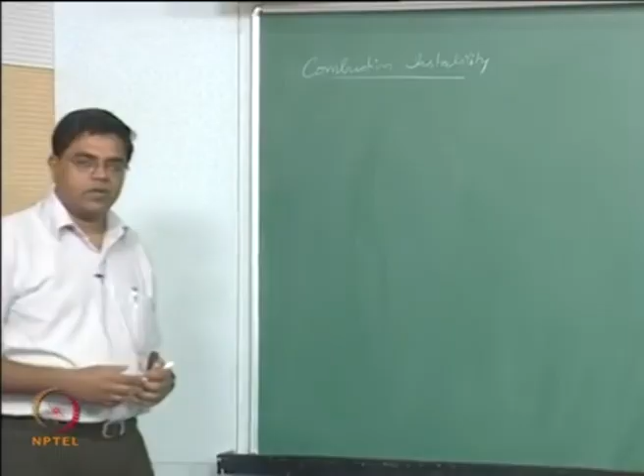Today we will talk about, in just about one lecture, this fairly broad, rather interdisciplinary topic of combustion instability. We include this because it's my favorite topic, and I wanted to cover it as part of the lectures on combustion. Again, the goal here is to show that whatever we have learnt in the laminar framework can be used to understand more complicated problems, one of them being combustion instability.

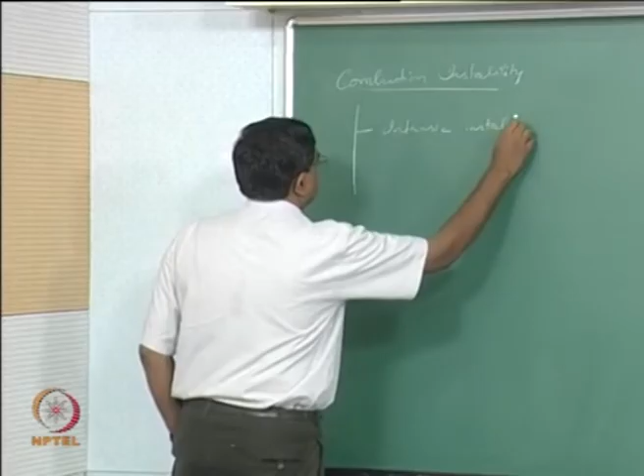Early on, I think Williams had actually identified that there are three aspects to combustion instability: one is intrinsic instability, the second is combustor instability, and the third is system instability. We will first briefly look at what these individually mean, and then start looking at the details of each.

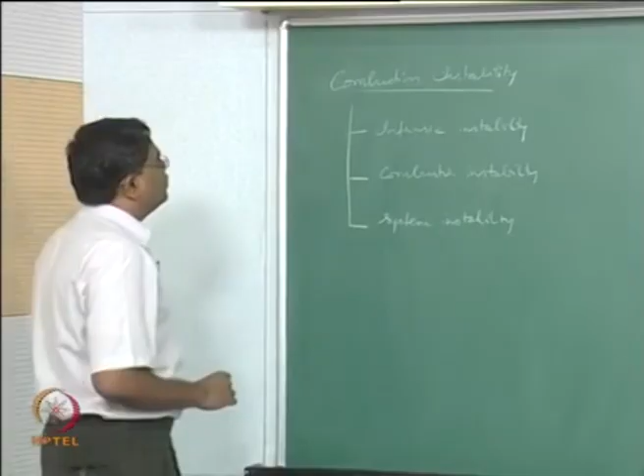But before that, we should first look at the word instability, regardless of combustion. The idea of instability is not specific to combustion. It's something that comes from what we call perturbation theory. Essentially it's an idea, of course much more than that—I think it's a much more commonsensical idea.

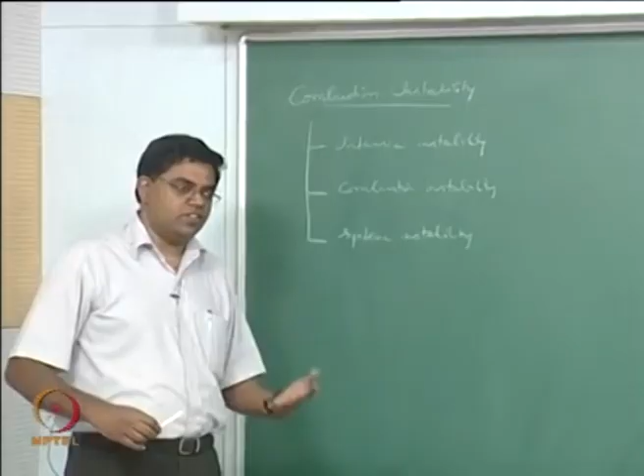There are lots of things around us which show inherent characteristics of instability. Some extremely social examples would be, for example, if I don't exercise I grow heavier, and that makes it more difficult for me to exercise, so I keep growing heavier—that's an instability. Or another example: if people stop using public transport, the transport system runs in losses, so they run fewer buses, and therefore we go further away from using public transport, and the buses stop running, and so on. Lots of such social or human situations go through what's called instability.

So the basic idea is, if you have a system which we think is in equilibrium, and then we try to make a small perturbation, the question is whether the system comes back to the original position, or goes away from it. There are a few different things that are important here.

You could have a dynamic system which is in equilibrium locally, that is, at a particular set of parameters. For example, in a flow system the parameter could be Reynolds number; in a combustion system it could be equivalence ratio. You could be running an engine at a set of conditions like airflow rate, equivalence ratio, pressure, and initial temperature of reactants. For that set of conditions you have some equilibrium, and we are talking about perturbing about an equilibrium for a given set of conditions.

If you move your set of conditions, you reach a new equilibrium, and that need not necessarily be as stable as the previous one. So equilibrium doesn't necessarily mean stability—you could have an unstable equilibrium or a stable equilibrium.

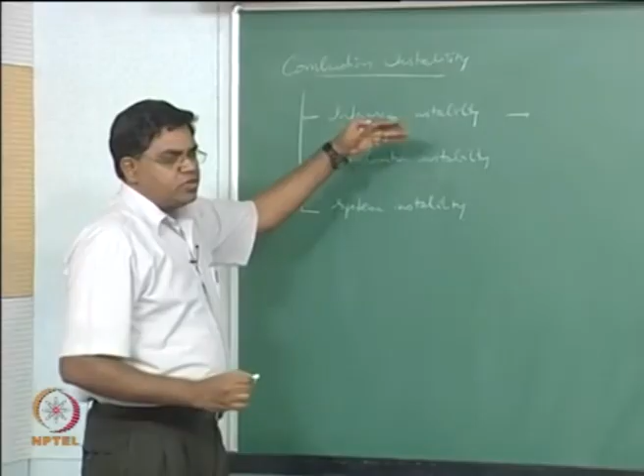Intrinsic instability, then, is actually an instability where you do not have anything else coupled to the combustion—it is only the combustion itself that is unstable. So the flame exhibits instability by itself.

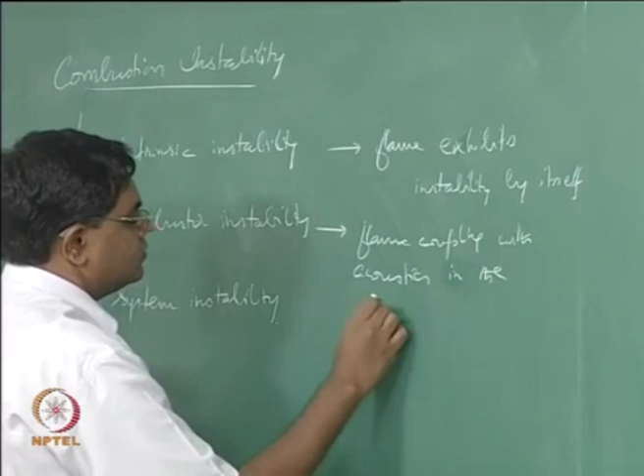A combustor instability is a system of flame coupling with acoustics in the combustor. This is a flame-acoustic system where you have a feedback loop between the flame and the acoustics in the combustor. Essentially, it is not a standalone combustion that is going unstable, it is combustion coupled with acoustics in the combustion chamber that is going unstable. So that is the combustor instability.

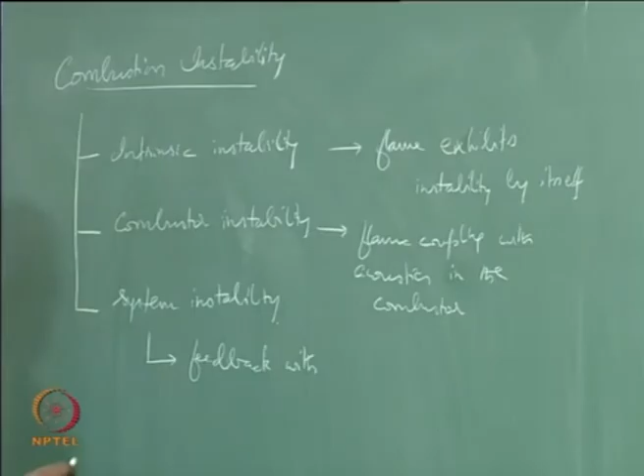The system instability is feedback with, let us say, fuel supply, air supply or oxidizer supply, etc. That means it is now a bit more specific to how the system is actually configured, which is going to cause this instability. Again, we will talk in greater detail about this.

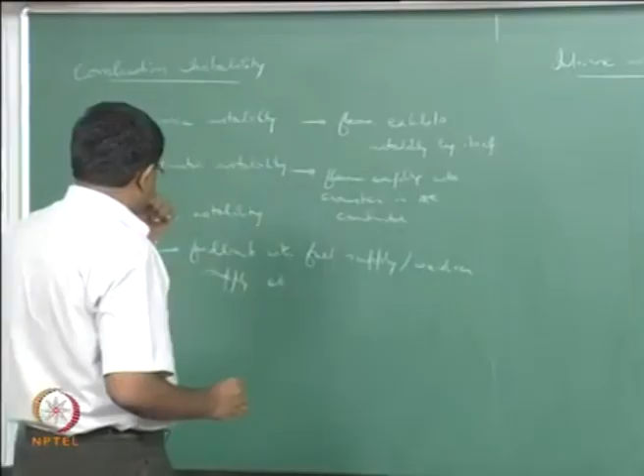So let us first talk about the intrinsic instability here. We shall talk about premix flames—or I shouldn't say plain premix flames, because that's the point of contention as far as the instability is concerned. Let us look at premix flames. We have talked about the issues involved here.

We could talk about two things: one is the thermal diffusive instability, and the other one is the Darrieus-Landau instability.

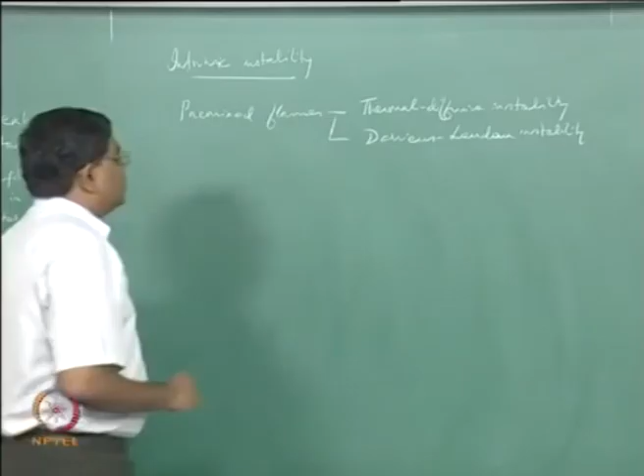We have actually discussed this previously when we were talking about corrections to the laminar flame speed, where we were basically talking about these effects of flame curvature and flow divergence effects.

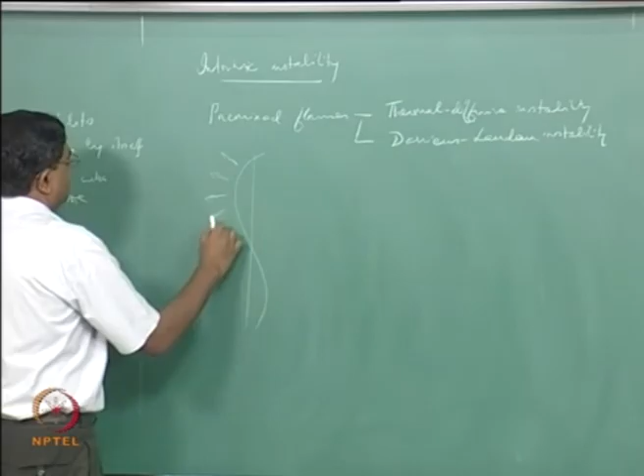So what we are basically saying is, if you now have a planar flame and then you perturb this, then we have the situation where the heat is actually going radially outward in a flame that is curved concave relative to the upstream reactants. Of course, the flow is going from left to right, and in this case the heat is actually converging.

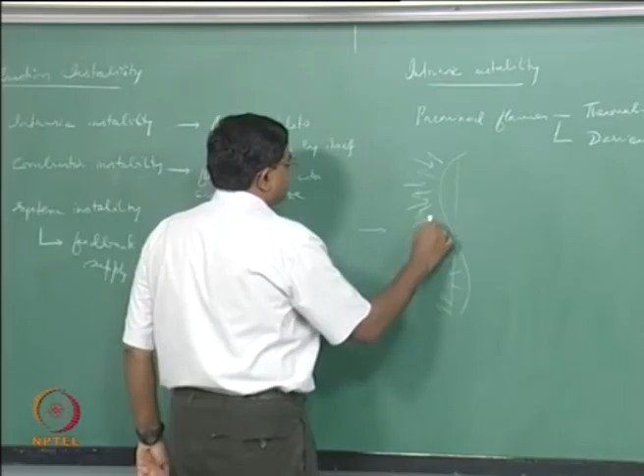While the heat is diverging here and converging here, the reactant flow or reactant diffusion into the flame is happening in the opposite direction. That means here all the reactants are actually converging towards the flame, and here all the reactants are actually diverging.

So you have a lesser concentration of reactants in this flame, but they get heated up more. But you have a greater concentration of reactants here, but they are getting heated up less, because the heat is getting distributed.

So now the question comes, what is the effect of Lewis number? The thermal diffusive instability is directly a consequence of non-unity Lewis number.

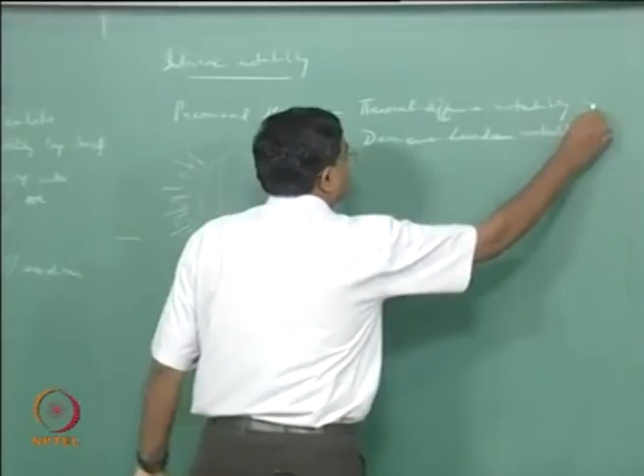So when you have a non-unity Lewis number, then the heat conduction upstream to the reactants and the reactant diffusion downstream to the flame don't happen exactly over the same length scale.

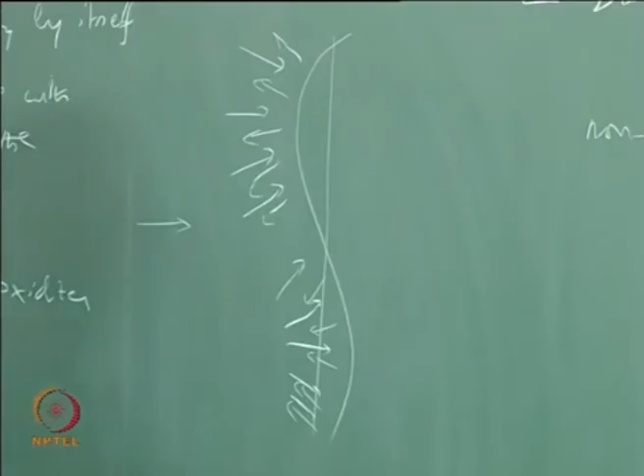We have gone through this: when we have a larger Lewis number, that means your conductive effects are actually more compared to diffusive effects, whereas it's the opposite for a smaller Lewis number. Depending upon this, you will find there are ranges of Lewis numbers for which you will have something that is unstable.

So this leads to an unstable flame, or oscillatory, or stable flame.

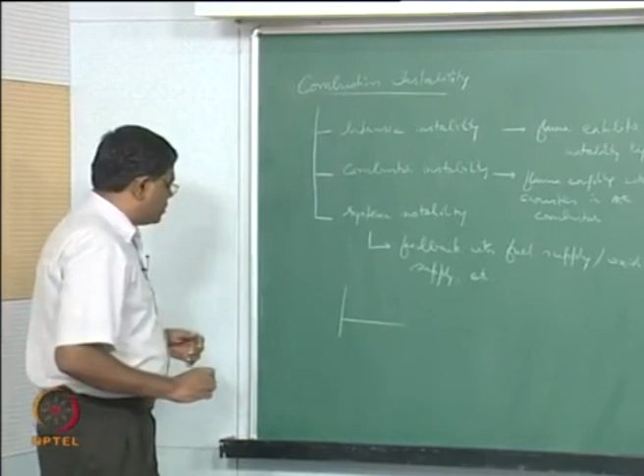What is meant by that is, going back to the idea of instability in general: if you now have an equilibrium point and then you give it a perturbation, and you are now trying to track what happens to the amplitude of the perturbation with time—if it comes down like this, that's stable. If it now grows like that, that is unstable. The amplitude keeps on exponentially growing, that is unstable.

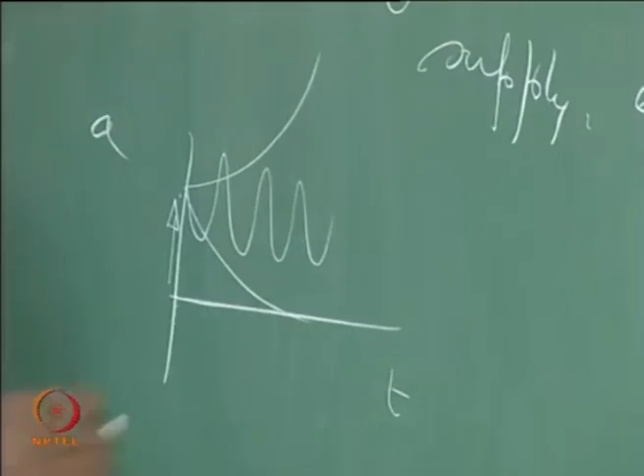The other possibility is it looks like it is actually coming closer to the equilibrium point, but it begins to oscillate. For clarity, let us also look at a couple of other situations where it could look like it is coming back, but then it oscillates and its amplitude keeps growing. So this is oscillatorily unstable.

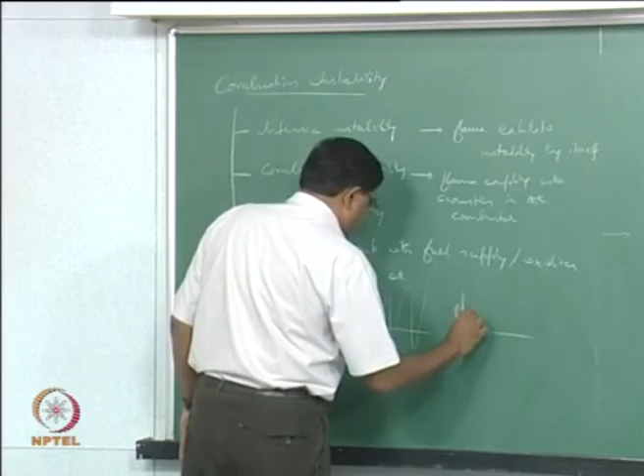The other situation is when you now have something that comes back in an oscillatory manner. So this becomes stable, meaning the amplitudes are dying down, but in an oscillatory manner. There are many such possibilities. What we are talking about here is a possibility where the amplitudes remain constant—in fact, this refers to the way a pendulum behaves.

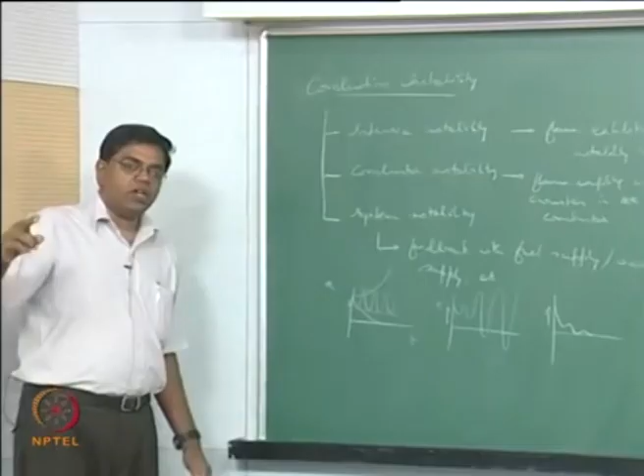So when you now give it a tap, it looks like it comes back, but it kind of misses the equilibrium point because of inertia, and it went to the other side, then it goes back. It looks like it's going to be stable, but it went to the other side, and so on. Since you look at a displacement and a small perturbation, it looks like it's coming back, so you tend to think it is stable, but that is only static stability. Dynamically, it actually attains a neutral equilibrium of an oscillatory state.

In nonlinear dynamics they would refer to it as a Hopf bifurcation and so on, but we will not get into all that jargon here.

We will just say, for example, you could have an unstable flame. That means when you have a planar premixed flame that is perturbed, it could get increasingly non-planar, so if it starts getting curved more and more, that's an unstable flame. A stable flame, on the other hand, is where you have a perturbation and then it gets back to being planar. An oscillatory flame is one that starts actually oscillating with a certain constant amplitude. So there are many such behaviors.

The oscillatory flame is something I will talk about more in the context of partially premixed flames, but right now, for different Lewis numbers, you can find that the flame becomes unstable or stable. The Lewis number is actually a function of the reactant, because it involves the diffusivity of the reactant. Usually we are talking about non-unity Lewis numbers of the deficient reactant, because the deficient reactant is the one the flame is more sensitive to.

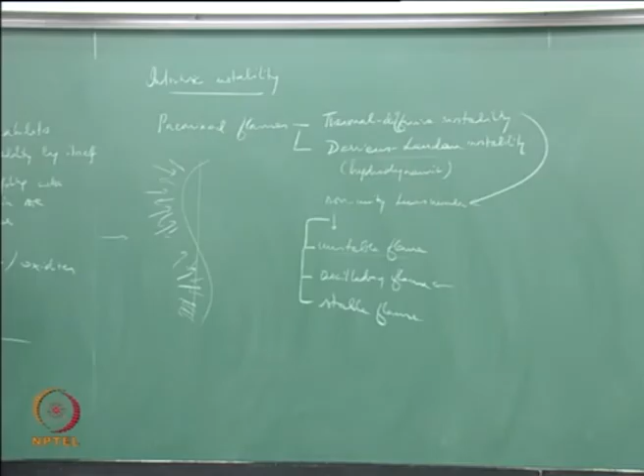The other kind of instability we are talking about is the Darrieus-Landau instability, or hydrodynamic instability. This is also something we talked about in the context of corrections to the laminar flame speed in a steady state framework, but not in an instability framework, where a premix flame can be thought of as a line of discontinuity between two different regions of different density. You have the cold reactants that are denser, and the hot products that are lighter.

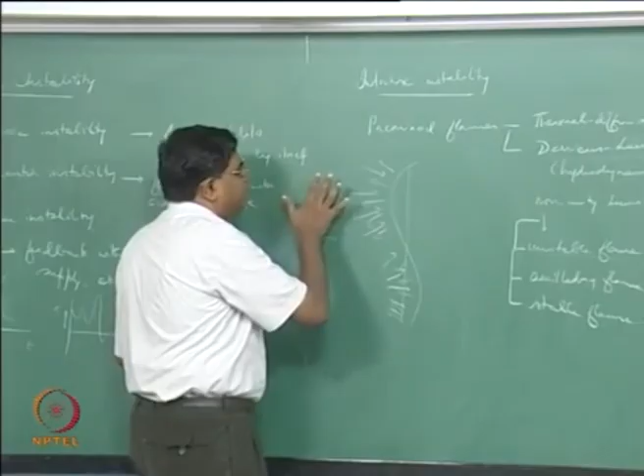Because of this, you now have a flow divergence or flow convergence behind the flame, which could in turn accentuate the curvature. So the basic idea of the Darrieus-Landau instability is: if you have any interface between two fluids of different densities, it is inherently unstable, intrinsically unstable, or unconditionally unstable. That's the kind of mechanism you will see prevailing in flames as well.

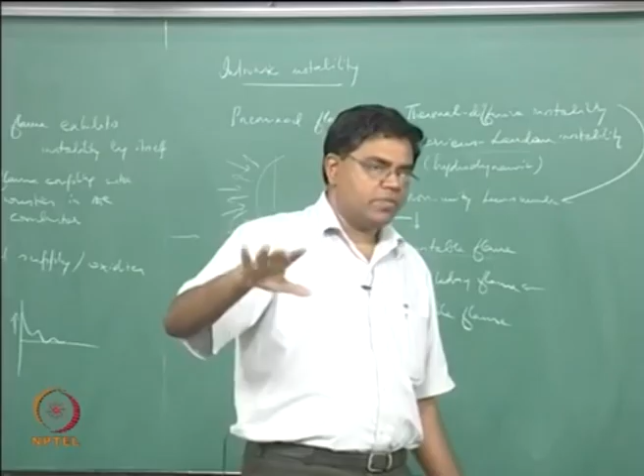There are similar examples—for example, look at the surface of water with air on the other side. You now have two fluids of different densities separated by an interface. This interface is susceptible to perturbation, and when this perturbation happens it starts forming waves. Similarly, flames are also interfaces between fluids of two different densities—colder, denser reactants and hotter, lighter products—so you would face hydrodynamic instability as well.

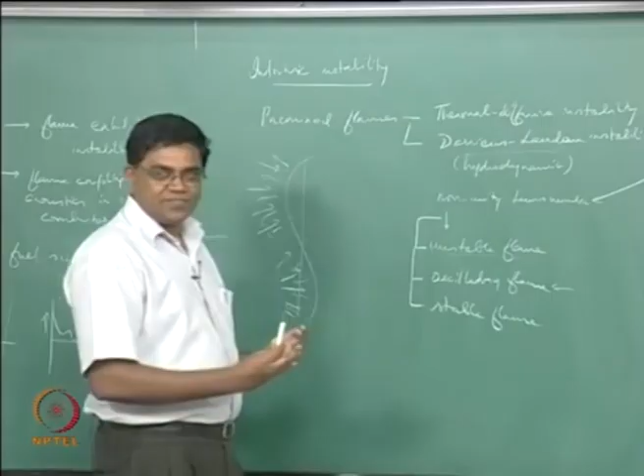In practice you have a combination of both, and therefore it is not unrealistic to expect planar premix flames in the laboratory. That is not because they are both thermal-diffusively stable and Darrieus-Landau stable—they could be unstable, but those instabilities cancel each other out. One instability causes it to move away from the original position, while the other tends to bring it back. So one could be destabilizing and the other stabilizing. The stabilizing mechanism could overwhelm the unstable mechanism, or even if both are trying to be unstable, they counteract in such a way that you get a stable flame.

This is possible. Now in the extreme case where you have an unstable flame and the curvature keeps growing, then you get into a regime called cellular flames.

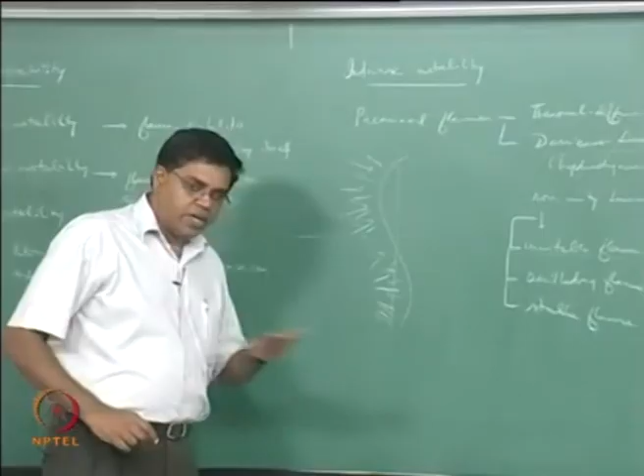So this effectively leads to cellular flames, where the premix flame is no longer planar but actually breaks down into many different cells, and it now reaches a new equilibrium, a new stable equilibrium where it exists as these cells, and that kind of flame structure is what is called a cellular flame.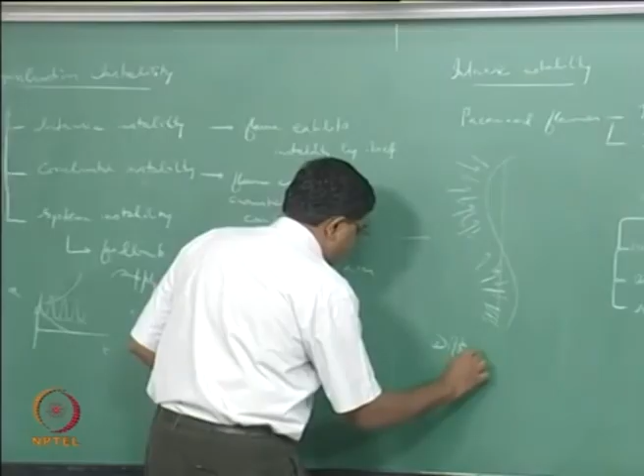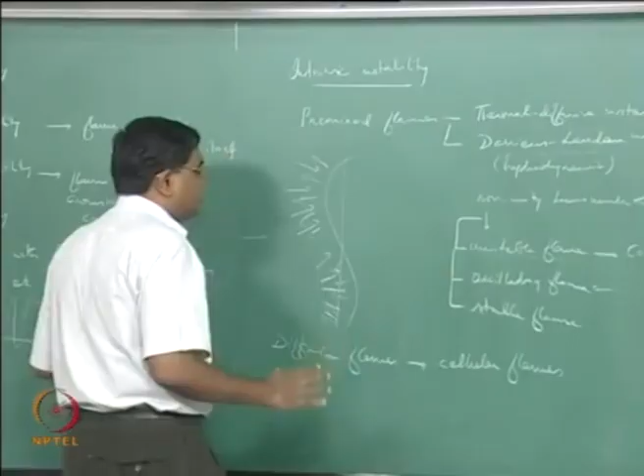A cellular flame kind of structure is also observed for diffusion flames - this is diffusion flame instability. So for diffusion flames you can also expect cellular flames under some conditions. In fact, thermal diffusive instability is predominant in diffusion flames because you are expecting diffusion effects to be important there. Darrieus-Landau instability is not as common because you don't really see the density jump happening as much as in a premix flame. So premix flames are more susceptible to that, but in reality, when you have a non-unity Lewis number and varying density with temperature, you can expect both mechanisms to prevail to different extents.

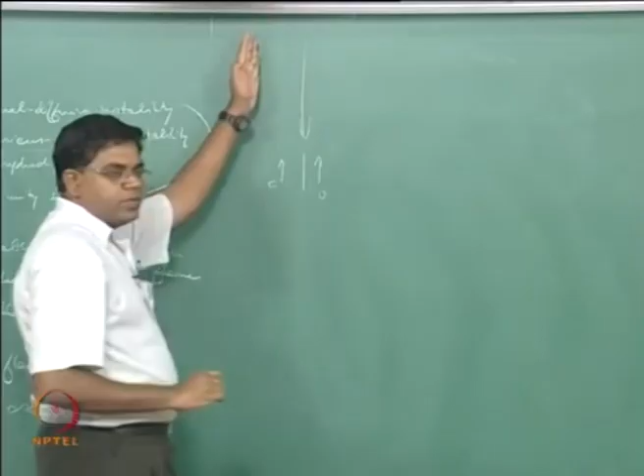Then finally we have the situation of partially premixed flames. Here there are some regimes of Lewis number greater than 1 where you get an oscillatory flame - that means you're looking at something like a triple flame, something more compact, essentially an edge flame. So if you look at a triple flame like this with a splitter plate, you have fuel on one side, oxidizer on the other, a trailing diffusion flame, and you have the fuel rich branch and the fuel lean branch.

There are some Lewis numbers for which this entire structure begins to oscillate back and forth at a constant amplitude. Of course if you change your Lewis number or Damkohler number - the Damkohler number dictates the standoff distance. Damkohler number is effectively an indicator of the finiteness of the chemical reaction rates, so the more finite the chemical reaction rates are, or less close to infinite chemistry, the more finite the Damkohler number, and correspondingly the standoff distance will increase.

And of course even under stable conditions you will not get an equilibrium flame established below a certain Damkohler number, and the flame blows off. That is a steady state - there is no steady state solution that exists.

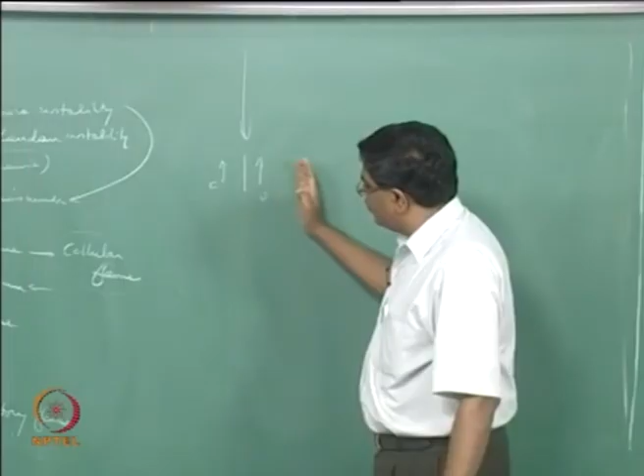Now for a steady state solution that exists, this is susceptible to small perturbations for some Lewis numbers greater than 1, where it actually undergoes oscillatory instability also. That is the case where we talk about constant amplitude, and of course the amplitude and frequency are functions of Lewis number and Damkohler number, and they change continuously. You can also think about the fuel oxidizer ratio, concentration gradients that the flame is subjected to, and so on. So these are the parameters over which the oscillatory instability will manifest.

So that's about intrinsic flame instabilities. Now let's look at combustor instabilities.

Here basically what's happening is, if you now have a flame that is being perturbed, the basic thing we are looking at is what's happening to its properties - mainly in this context the heat release rate, the temperature downstream of the flame, the density downstream of the flame. Of course all these things are related: the temperature rise is related to how much is the heat release, and the density fall is related to the temperature rise.

So if you now perturb the flame and the flame moves around, the heat release rate undergoes a fluctuation, therefore the temperature undergoes a fluctuation, and the density undergoes a fluctuation. When you have these fluctuations, they set out acoustic waves away from the flame, and these acoustic waves will go and get reflected at the ends of the combustor, then get reflected back and set up a standing wave. This standing wave is now going to fluctuate the flame further, and when the flame fluctuates further, it sets out a stronger acoustic wave, so the prevailing acoustics begin to get amplified, and this amplified acoustic wave sets up a stronger standing wave which now oscillates the flame even further, and so on. So the amplitude of the acoustic oscillations keeps on rising - in fact the amplitudes of every oscillation keep rising. This is essentially the coupling of the flame with the acoustics.

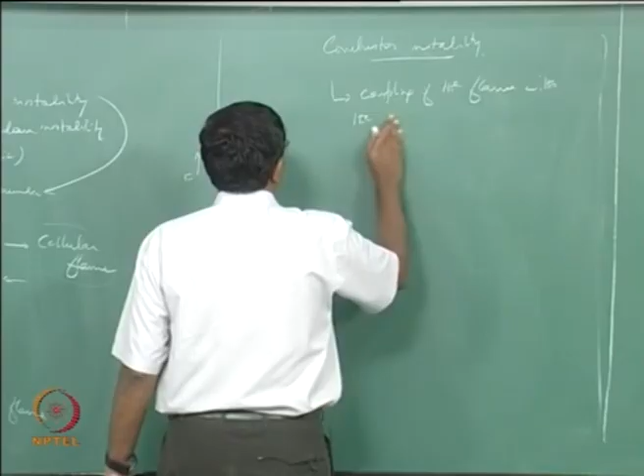Before I proceed further, I should say that the situation I just described is something that is very simple to think about for gas phase combustion. That means you have a gaseous reactant, gaseous fuel mixing with gaseous oxidizer, maybe a premix flame, maybe a diffusion flame, but essentially some gas phase flame undergoing this and causing this situation.

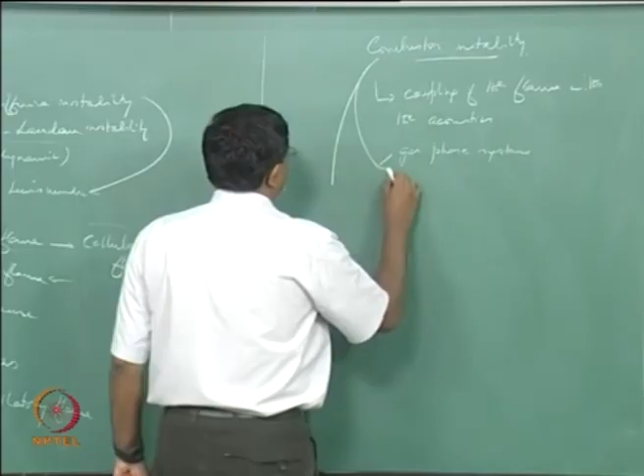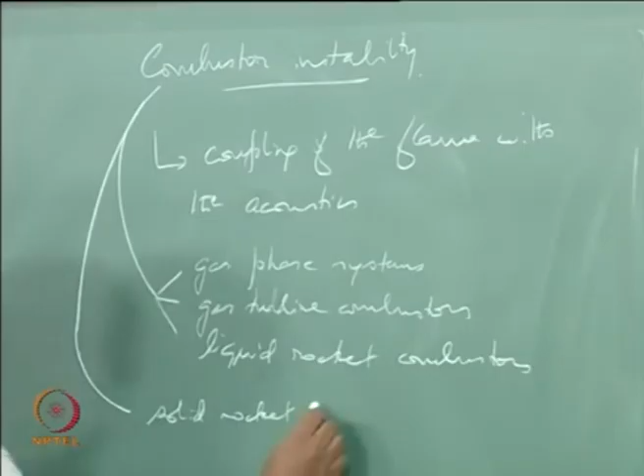Before we proceed, I should point out there are two ways of thinking about this depending on what we're dealing with. On one hand, you could deal with gas phase systems, gas turbine combustors. Gas turbine combustors could be gas phase or liquid phase systems. There are land-based gas turbines that use natural gas for powering them, or aviation gas turbines which use liquid fuels, so you could have liquid fuel as well. You can also talk about liquid rocket engines, liquid rocket combustors. But on the other hand, you also have solid rocket combustors, and the way things happen in a solid rocket is slightly different from the way it happens in these. So we'll first discuss what happens over here, and then go back and look at what happens here. So let's look at gas phase combustion.

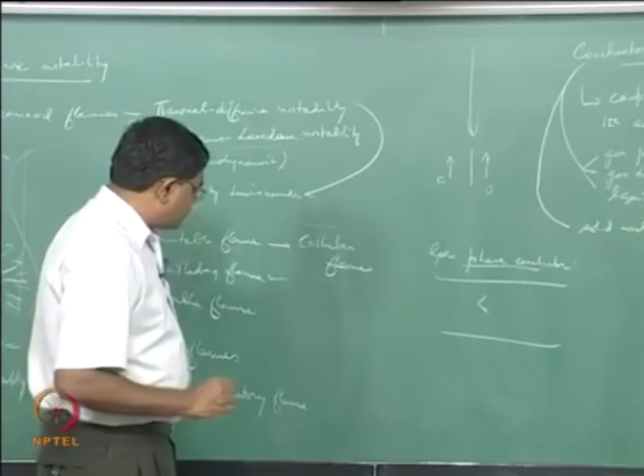Gas phase combustors, many times we're interested in them having premix flames. So you could think about a combustor with a typical geometry - a simple geometry for us as far as premix flames is concerned. Let us suppose we now take a V gutter. If you take a V gutter, we'd like to think you can have a flame established like that, anchored at the edge of the bluff body, and then it extends out. We talked about this when dealing with flame shapes - the flame tries to propagate with a turbulent velocity, and it orients itself so the local normal velocity component matches the turbulent flame speed.

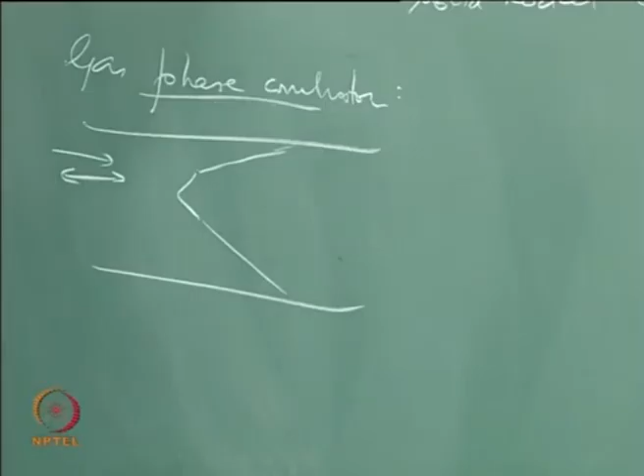But then the question is, what happens when the flow velocity begins to oscillate on top of a mean flow? So you have a mean flow, but it's now going to go back and forth. Why does the flow velocity oscillate? To start your thinking, let's suppose there's a perturbation, and we want to point out this is going to give rise to more flow fluctuation. So when you have a flow velocity fluctuation, you have a faster flow sometimes and a slower flow sometimes.

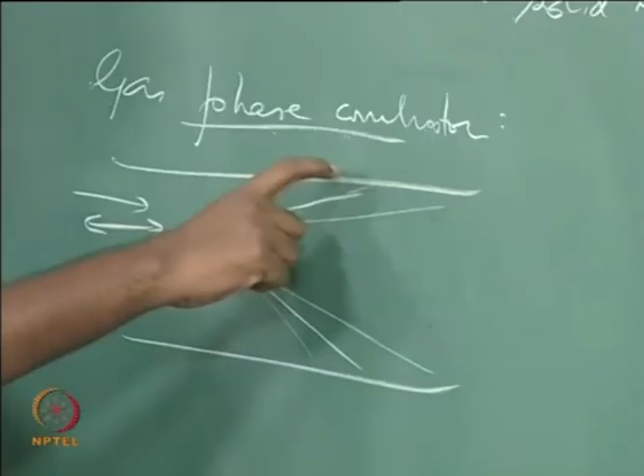When you have a faster flow, the flame gets more inclined, and when you have a slower flow, the flame tries to propagate further in, so it goes like that. Essentially the flame flaps back and forth like this. When the flame flaps back and forth, look at what happens to the flame area - it keeps fluctuating, and since the flame area is where heat release happens, the total heat release in this region fluctuates too, because you had a larger area versus a smaller area over which heat was released. So you get heat release fluctuations because of the velocity fluctuations. These heat release fluctuations send out acoustic waves that amplify the oscillation, and as the oscillation gets amplified further, it becomes wilder - that's the instability we were talking about. But unfortunately, life is not as simple as this.

So what happens in reality is, when you're now trying to send this fluctuation, the flame simply doesn't move back and forth like this. Instead, it actually moves more like that.

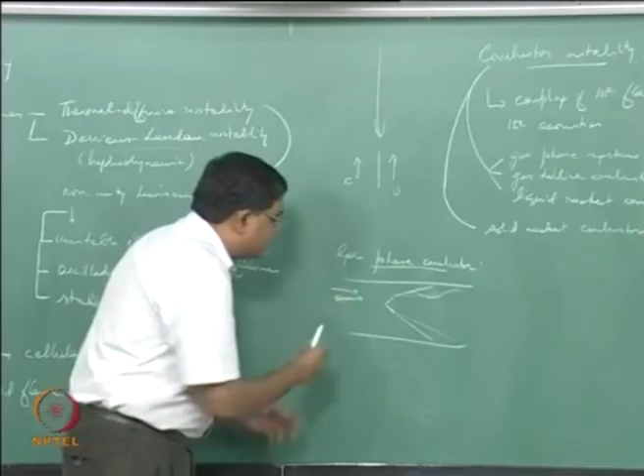There is a perturbation that happens in bulk for the flow, which the flame tries to match, but there is also the perturbation that is being sent along the flame. So there are two ways in which this perturbation is propagating: one from the boundary along the flame, and one in the flow field itself.

So depending upon how long the flame is locally, the wave that is propagating along the flame starting from the boundary, and the flow fluctuation that is happening anywhere locally on the flame, they are going to interfere constructively or destructively, and depending upon that you are now going to get a wavy pattern.

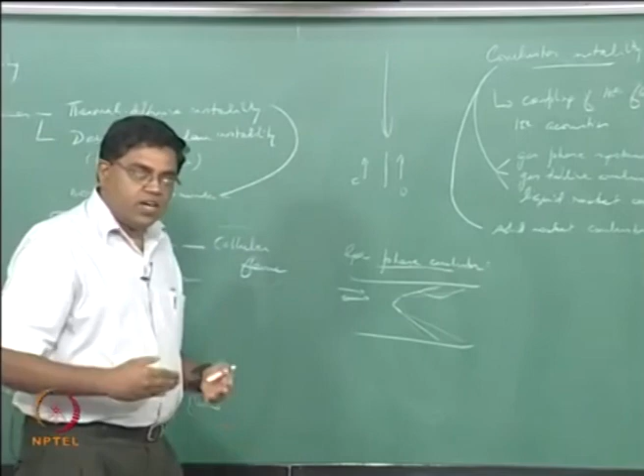This now adds further to the flame area fluctuations, and on top of it we have to consider, now that you have a non-planar flame, the flame curvature effects and the flow divergence effects on the flame propagation speed.

So there are all these other things, and in reality the other problem that happens is the flame anchor point, where it is actually being held at the flame holder, that itself fluctuates, because at the anchor point we went through this dynamics.

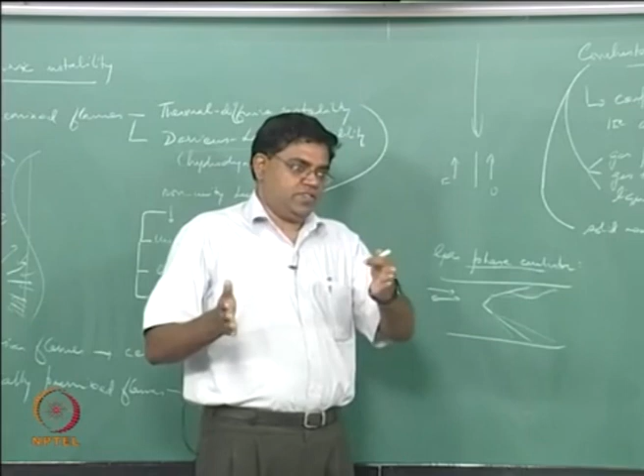You now have an entrainment of non-reacting gases on the one hand and a heat loss on this, and this heat loss begins to fluctuate, the entrainment begins to fluctuate. So where exactly the flame stops away from the burner, that fluctuates, and that is where the perturbation is being sent along the flame.

So if the flame itself were to move away and then you now send a fluctuation along the flame to constructively or destructively interfere with the bulk flow fluctuation, then the flame shape gets altered correspondingly, right. So these things actually complicate this matter.

This is purely what we call a kinematic effect. The moment we are talking about the flame speed and a flame sheet, and the flame is trying to balance the flow, that kind of idea, all the dynamics is considered within the flame.

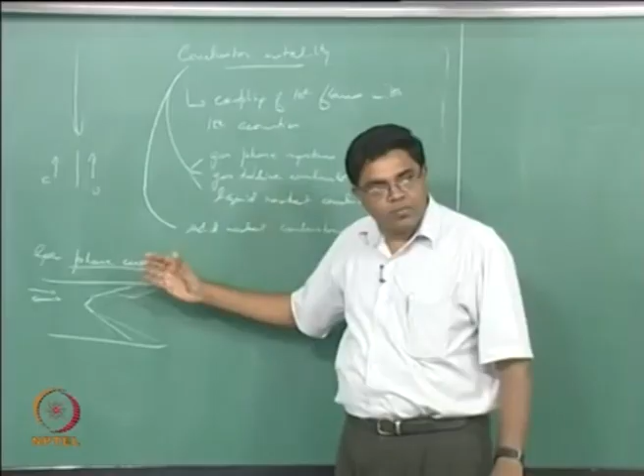We have long gone past the point where we have to worry about the dynamics of the energy balance and the species balance and so on that happens within the structure of the flame. We only worry about how the shape changes now. So this is not even dynamics, it is purely kinematical effects, right.

So these are some of the things that happen in the case of, let's say, premix flames. Similar things also happen in diffusion flames, except that we don't really talk too much about it.

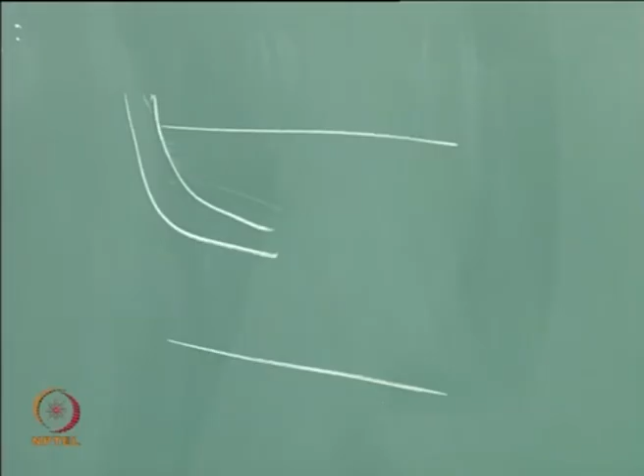So let us suppose that you now had a simplified gas turbine construct where you try to have a flame that goes like this, and then you adopt a Burke-Schumann approach to strictly get a diffusion flame, because if you didn't adopt a Burke-Schumann approach where you had a flame sheet assumption where the flame sheet is coincident with the stoichiometric surface and so on, then we will have a flame standoff.

You will have partially premixed flame, you will have flames that look more like this. That's what happens in reality, but for the sake of thinking about diffusion flames, let's think about a Burke-Schumann flame, and suppose that you now have an overventilated Burke-Schumann flame.

And now let us suppose that we now oscillate the flow on top of a mean flow. The mean flow was the one that gave rise to this flame shape, all right, but the moment you oscillate this flow, you begin to actually have, well, what would you expect? The first order effect, of course, is...

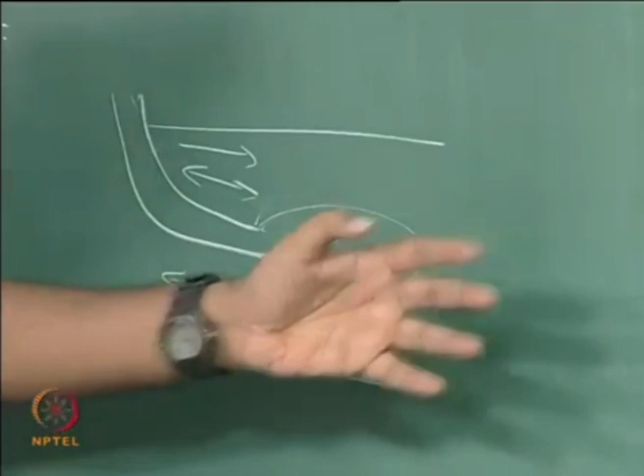The first order effect, as we saw earlier, is if you now temporarily have a flow that is going faster, then it should actually prolong the flame, right, and for the other half of the cycle where the flow goes slower, it should now shorten the flame.

So the flame shape should now begin to change like this, and therefore the flame area fluctuates again, and the heat release is happening along the flame sheet. Very similar ideas to what we had just talked about for the premix flame exist.

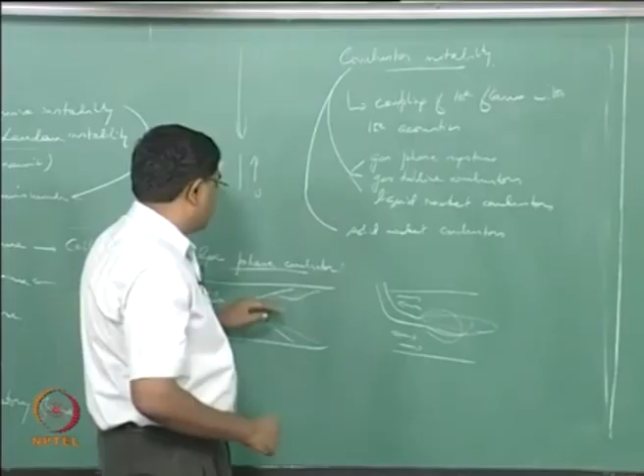So we could think like that, but that is a more simplistic idea. What in reality happens is like what we talked about: you also have a wavy structure that goes on for this flame, depending upon the frequency and the length scale of this flame, and therefore you have to factor that into account.

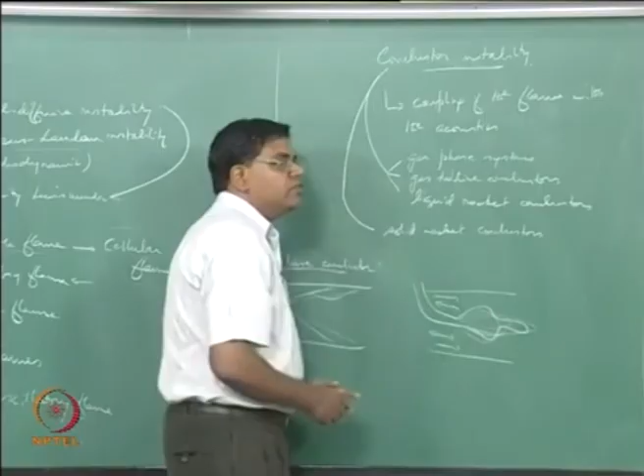Typically what we are interested in is the heat release fluctuation as a ratio of the mean heat release, for a given velocity fluctuation as a ratio of the mean velocity. So you have two things: heat release fluctuation over mean heat release, divided by velocity fluctuation over mean velocity.

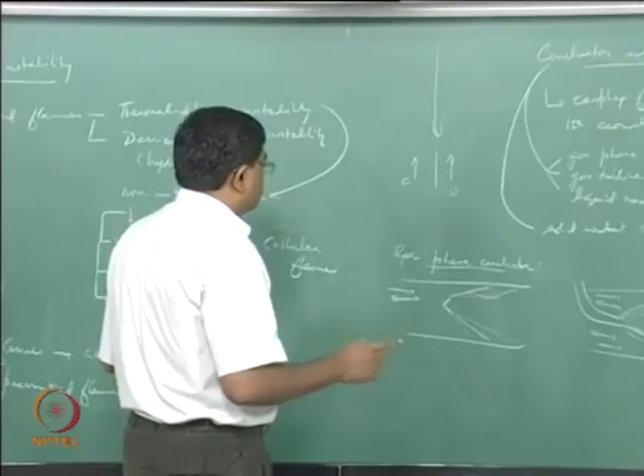This quantity is typically referred to as the flame transfer function, and there's a lot of work going on in this area. Essentially we are looking at the flame's response to oscillations, and in the gas phase flame context, these oscillations are happening because of velocity fluctuations. You don't expect a big effect from pressure fluctuations associated with acoustic waves—it's the velocity fluctuations causing the havoc.

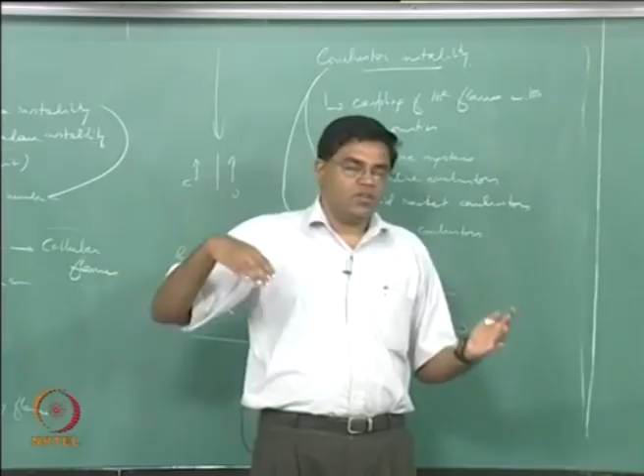So a quick fix would be: if you find huge oscillations happening, is it possible to locate the flame—the bluff body here, or the fuel injection point—in a place where there's a velocity node in the standing wave mode. You have a standing wave with velocity nodes, so try to locate the flames there so they're more silent, not subjected to huge velocity fluctuations no matter the amplitude, because the node always has zero velocity amplitude.

So if you try to locate your flames closer to the nodes—of course the point is the presence of the flame itself changes the acoustic mode shape. So you actually have to dynamically chase the velocity node and then locate it. It's a little more involved than just saying that.

Similarly there are other problems—one thing I haven't talked about is, if you have a bluff body, you get vortex shedding associated with it, and the vortex begins to curl the flame, which increases or decreases the flame area, and these vortices are shed. When the vortices are shed, they take away part of the flame and burn it elsewhere, and then a new flame is established, and so on.

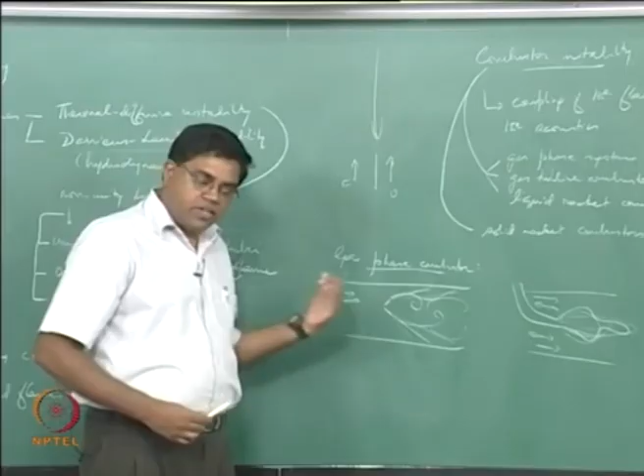So you now have heat release oscillations associated with vortex shedding, introducing a new time scale related to the vortex shedding frequency. How this vortex shedding frequency relates to the natural acoustic mode of the duct—satisfying the acoustic boundary conditions—will also play a huge role in dictating the acoustic amplitudes and the amplitudes of other fluctuations. This is getting quite complicated.

In solid rockets, on the other hand, you have a very different situation. Obviously we're talking about combustion chambers, so combustor instability. If you consider a solid rocket motor with a propellant shaped like this, everything that matters happens within a very short distance from the burning surface of the propellant, and within this very short distance...

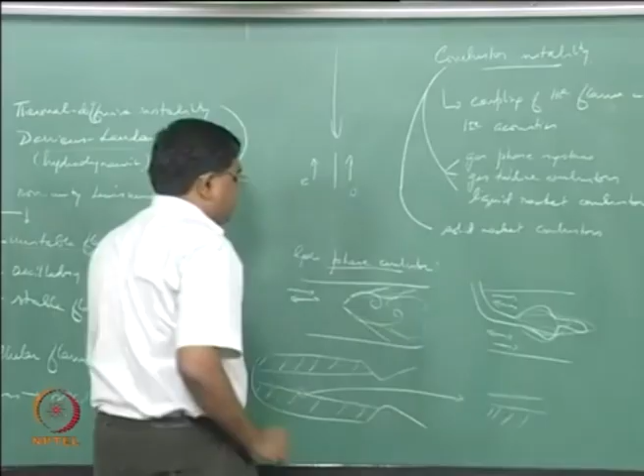If you think about this region—we talked about a homogeneous propellant which has a premixed flame, or a heterogeneous propellant where you have, say, oxidizer particles, and then some diffusion flame, maybe an edge flame here, and a monopropellant flame there, and so on.

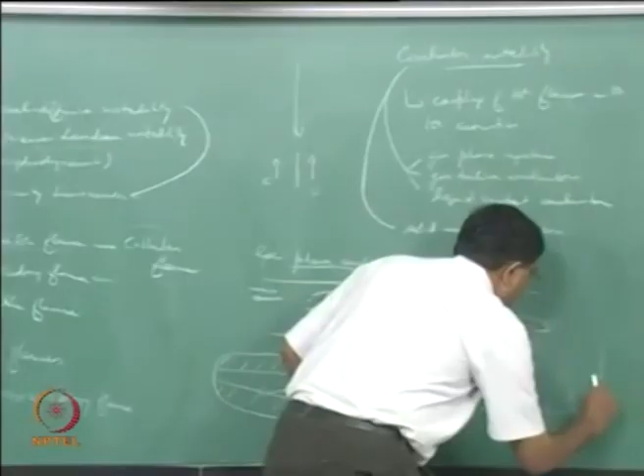The question is, what is the effect of acoustic oscillations in this chamber on this flame? Here, typically the way solid propellant rocket design is done is to look at how the burning rate of the propellant depends on pressure. Usually you get a picture where R goes as P, like that—and this is actually a log plot.

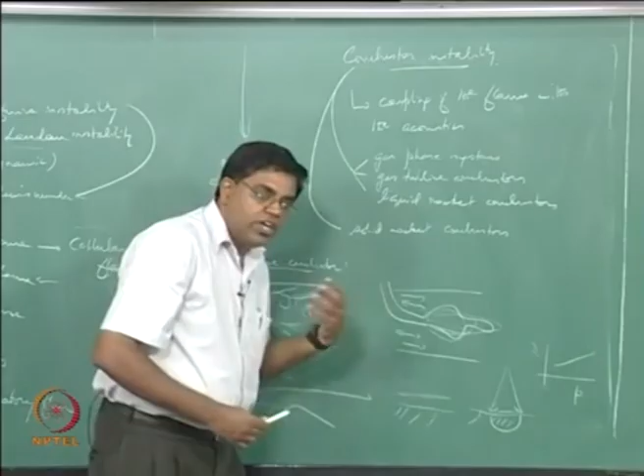What we are talking about now is, if I increase my pressure, then I expect that the reaction rates should increase, therefore the flames will get attached closer to the surface, and therefore they will send in more heat to the burning surface and give rise to more gases coming out. So as the pressure locally increases, we expect the rate at which gases are coming out should increase, or the burning rate should increase, the instantaneous burning rate should increase, and therefore it now puts more gas into the chamber, and that pressurizes the system more.

And when you now have less pressure because of the acoustic perturbation, then the burning kind of slows down and puts less gas into the chamber, so that relieves this, and then the pressure decrease further decreases. So when you have an oscillatory pressure, the way the propellant burns could, or most of the time does, actually help the pressure increase and decrease more and more.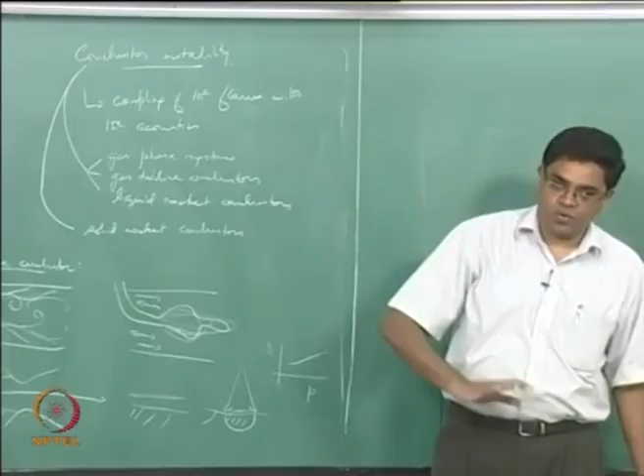So here, instead of looking at a velocity fluctuation based flame response as we did in the gas phase combustor, we look at a pressure based propellant combustion response. Here again we can think about a response function, but this is not in terms of heat release fluctuations and velocity fluctuations, this is in terms of mass fluctuations relative to pressure fluctuations. So the characteristic that we are using here to look at how the propellant responds to the acoustics is slightly different from how we deal with this class of problems.

Finally, let's now look at the system instability. This again is not directly related to combustion, but it affects combustion. This is mainly seen in gas turbines and liquid rockets, particularly gas-based gas turbines.

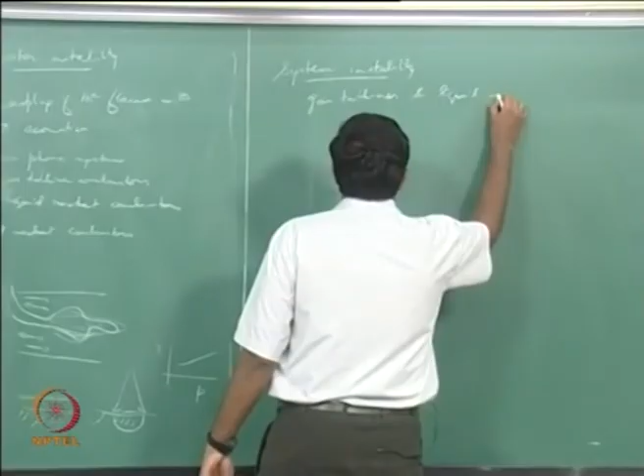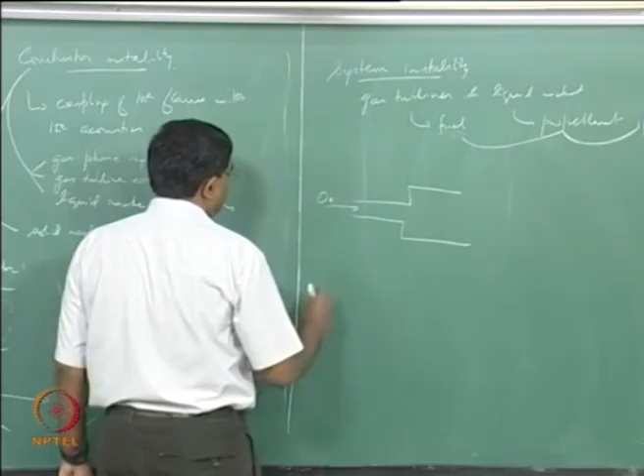Liquid rocket, you can say fuel here, you can say propellant here, both of them together you are looking at the feed system. So the best or simplest example we can think of is a situation where we have air or oxidizer coming in, and then you inject your fuel on the side, so that in this region the fuel and air actually mix with each other, and then you have a premix flame that is set up there.

What we are now saying is, if we have a perturbation, this flame now perturbs and gives rise to heat release fluctuations, which now sets up an acoustic wave. So you now have an acoustic standing wave from here to there, of course taking into account a step change that is possible.

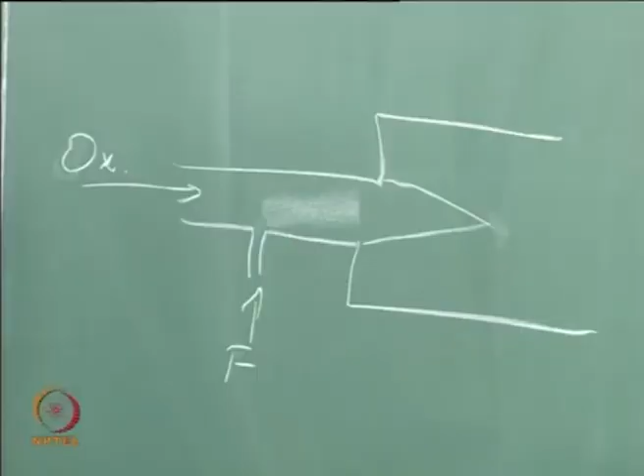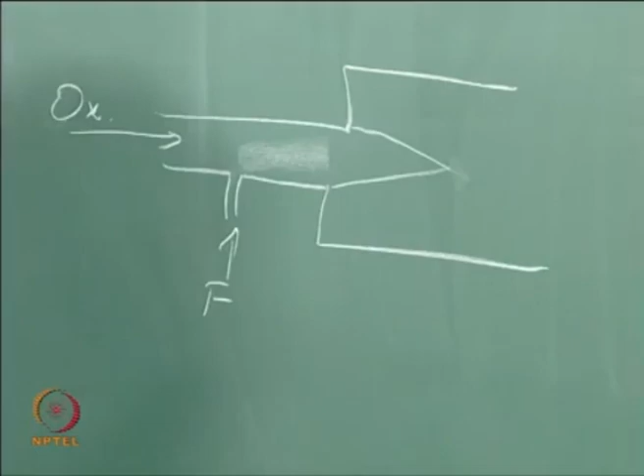So in this acoustic mode where the fuel inlet is located, the pressure there is going to fluctuate because of the acoustics, and when the pressure fluctuates you have a delta P fluctuation for the fuel inlet, and that corresponds to a fuel mass flow rate fluctuation. So when your fuel mass flow rate fluctuates for a given constant mass flow rate of air, you have what's called equivalence ratio fluctuations. This leads to something called phi prime. We are not even talking about the effect of u prime, the velocity fluctuations, we are talking about the effect of the equivalence ratio fluctuations.

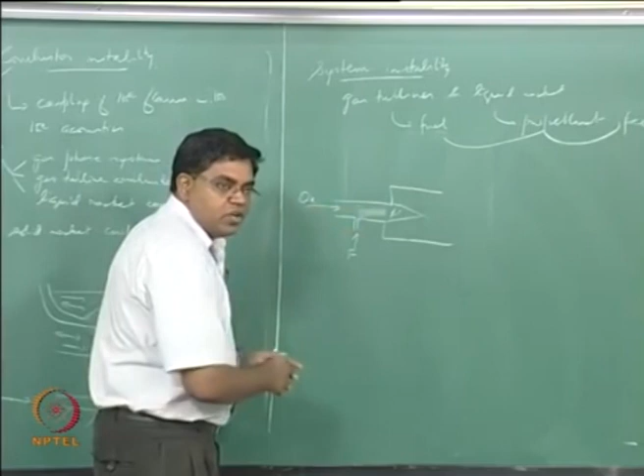So what basically happens is, for one half of the cycle where the pressure is increasing, you have less fuel coming in, so this is slightly leaner than the design point. When it is leaner, the flame now burns slower, therefore it elongates. But then in the next half of the cycle where the pressure decreases, you have more fuel coming in that mixes with the air. But the crucial thing is, it is not instantaneous mixing everywhere in the flow field at this inlet. So you now have a fuel pocket that convects down at the flow speed.

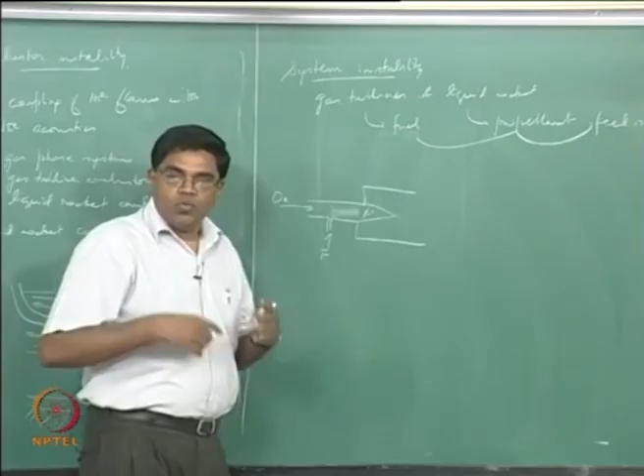So the question is, when the flame is trying to come back, if you now have a fuel pocket that arrives there mixed with air and makes it less lean, then the flame will want to come back more. That accentuates the instability. So when we say the fuel pocket comes here, that has to do with this distance relative to the velocity.

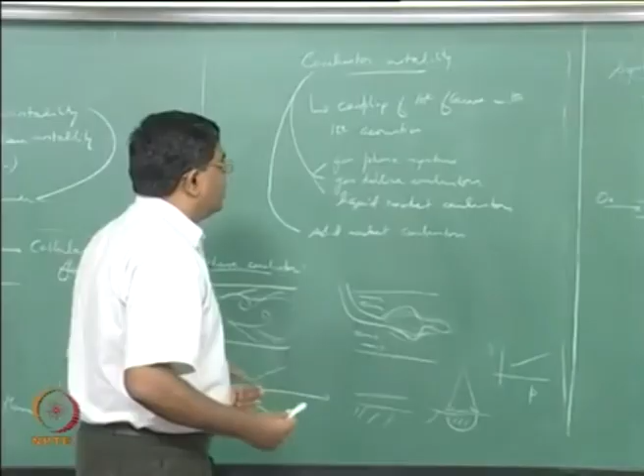So there is a convective time delay for pockets of fuel to mix with air and arrive. The equivalence ratio fluctuates because of this convective time delay, and that can feed back into how the flame flaps back and forth, changes its area, and contributes to combustion instability because of that. Similarly, in the case of liquid rockets, typically what designers do to avoid something like this is...

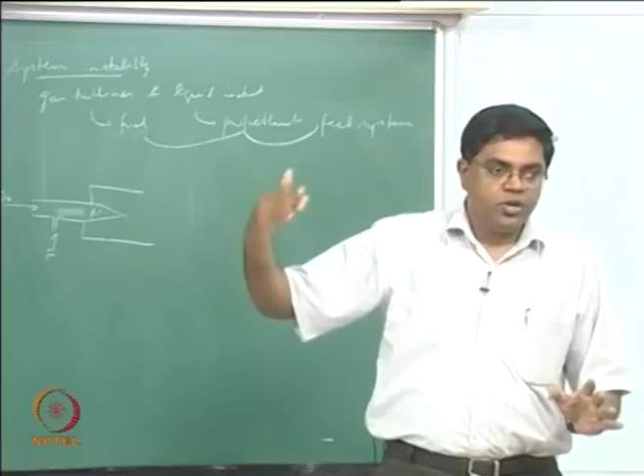They have an injector plate designed to take a delta P across it. The injection pressure is essentially the pressure upstream of the injector plate relative to the combustion chamber pressure. So it's a pressure differential, delta P, and they design this so that delta P is at least about 20% of the chamber pressure. That means the injection pressure upstream should be 20% more than the combustion chamber pressure.

That much delta P ensures that any oscillations happening in the combustor are not really felt upstream. You now have a fairly robust high pressure that can push the propellants at pretty much the same rate regardless of small fluctuations. If this were only marginally more, then any fluctuations here will propagate upstream significantly and cause fluctuations in the flow rates of liquid fuel and liquid oxidizer, and when they mix and burn, everything oscillates, which could increase these oscillations even more.

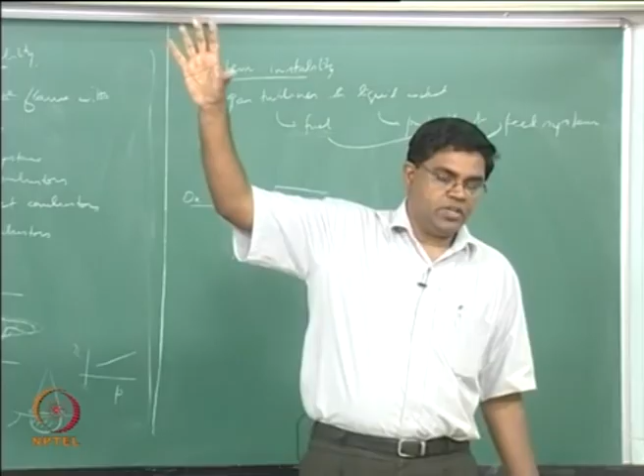In fact, many times when this isn't done right, these fluctuations can propagate all the way upstream to the tank, where they get arrested. Now your feed line has certain acoustic characteristics. Anything confined has acoustic characteristics because of possible reflections, standing wave modes, and so on.

So the feed line can amplify the acoustics if it resonates with the oscillations in the combustor. Many times the combustor could have radial modes, while the feed line could have a longitudinal mode at the same frequency. When these couple with each other, the oscillations become significant, and the whole system begins to oscillate all over the place, telling us that system instability is a very big problem.

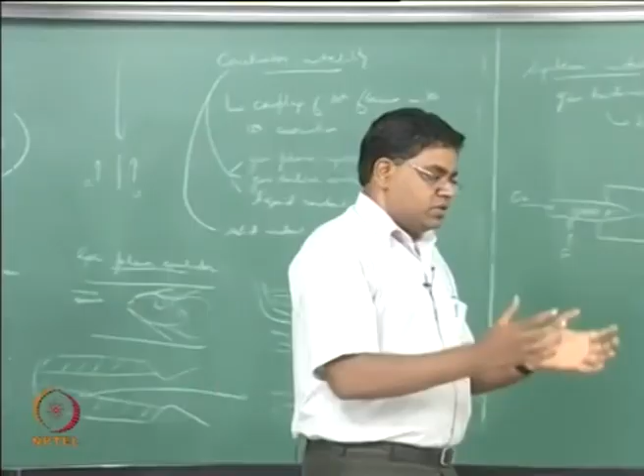But those are mechanical details, a bit removed from combustion. You have to keep in mind that heat release fluctuations in combustion are the primary driver for any perturbations to grow, and all other things begin to couple with it.

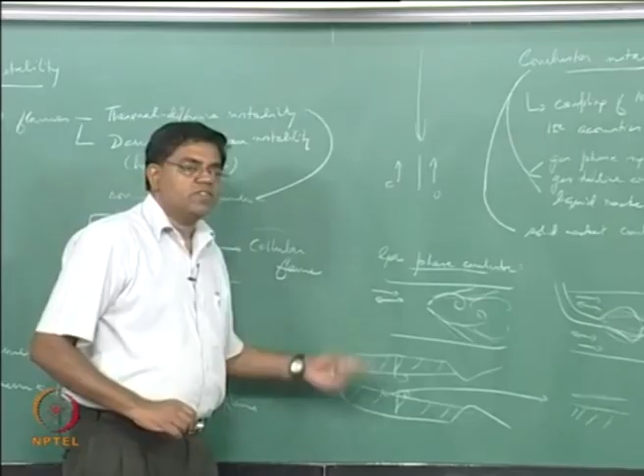Similarly, when you look at solid rockets with segmented designs that have inhibitors, the inhibitors can protrude into the flow as the propellant burns, producing vortices. These vortices give rise to pressure oscillations, but that's often not as significant as what it can do to the propellant combustion response. So this acts like a trigger, and the propellant combustion response then takes over and causes the combustion instability.

Many times there are other things in the system that go along with the combustion event once it's inherently unstable or susceptible to acoustic instability. So system instability is typically a secondary effect; it's combustion instability that we should mainly focus on trying to damp as much as we can.

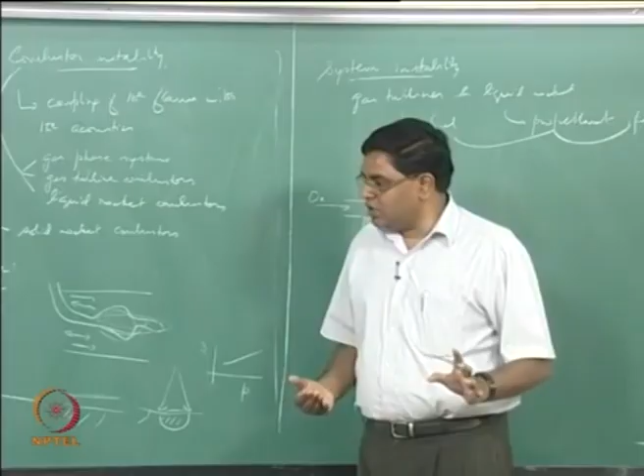We don't want to get into how to damp these things, just wanted to point out two things. One, such problems exist—things are not as steady as what we've been going through. They are inherently unsteady, or susceptible to perturbations. Second, we can understand many of these things based on what we've studied with laminar flows, laminar combustion, and steady state ideas. But the problems are a lot deeper than what meets the eye in this lecture.